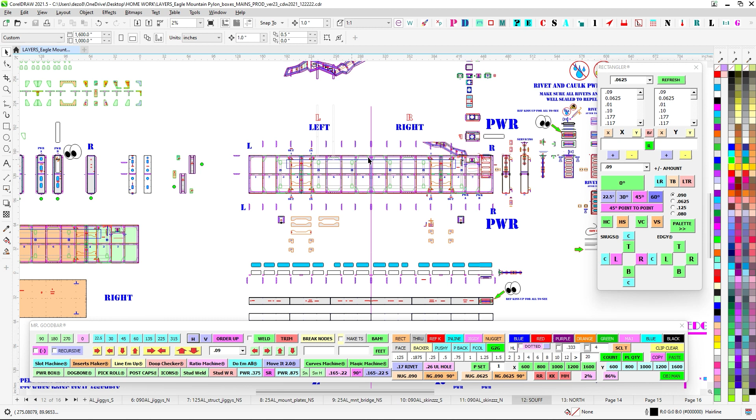But also they're a little easier to learn on, and a lot of the stuff on those will be transposed to this one. That's why I want you to watch that video first. I'm not going to over explain a lot of the box making on this, even though it's just bigger. It's going to be a lot of the same.

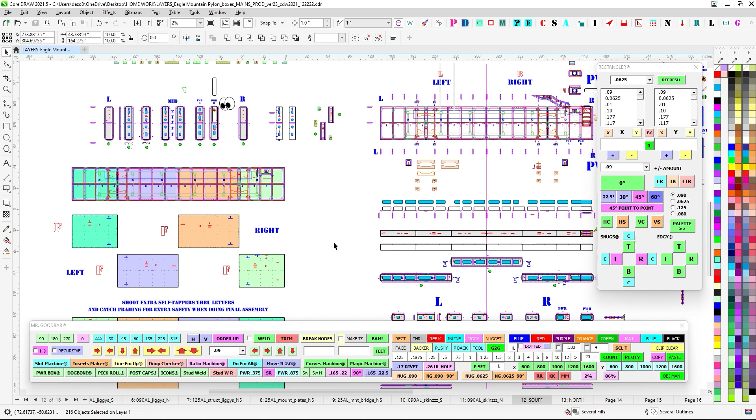What I am going to go over is obviously all the power stuff, and how the Mountin mounts here are going to, we're going to have like a bridge that the Mountin's attached to. So that's pretty much all that really needs to be focused on, the differences between the two. You can see where it's essentially a casino box, but just 2 of them.

This is going to be a lot similar to an oversized version of the Loma Linda Monument you did. You can kind of recognize the 2x there. So anyway, let's get into it. Let's get into the lay of the land. I'm going to need my trusty page turner here. There we go. So let's load it up.

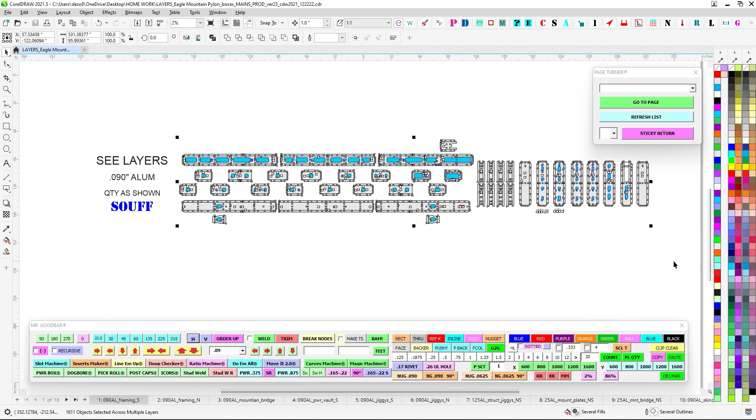So this one is broken into north and south. Like I said in the other video, the south side is going to be the one that faces the one that we're sort of used to looking at. And that one's going to have the power in it. So I have it all broken down with just the framing here. That's the south side. And then we have the north side framing.

090 parts for the Mountin bridge. We'll go over that. And this is going to be for the power box. This is going to be for the power supply. Look for these little things here. You got these little squares here. And then this is going to be for the main power in and the switch.

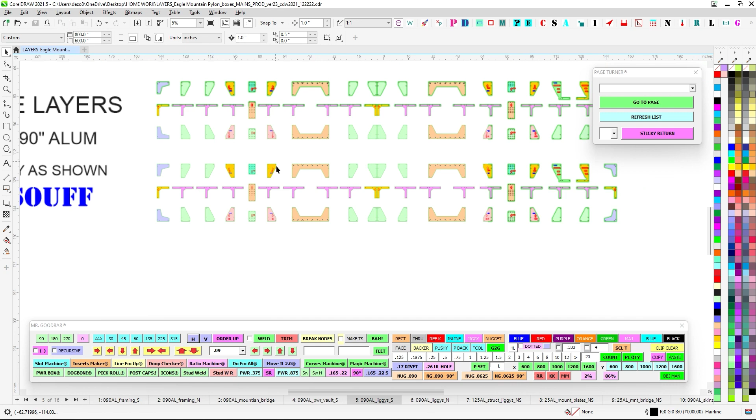All the jiggies, I broke the jiggies up south and north. We'll get into it, but we don't have to worry too much. South is the only one that has these 2 weirdos here. Otherwise, everything's the same. And north is all the same, except those weirdos are not there, but they'll have their own little north version. But otherwise, for the most part, everything else is all the same.

For these big boxes, these jiggies are different than the casino ones, but you'll see that they obviously won't fit. They're a little bit different size and stuff. But again, I encourage Route to just focus on the smaller casino ones first, get all that taken care of, and then there won't be any confusion with jigs and stuff.

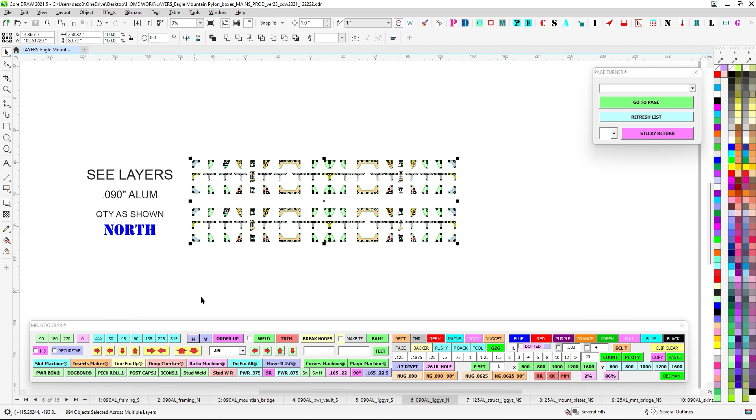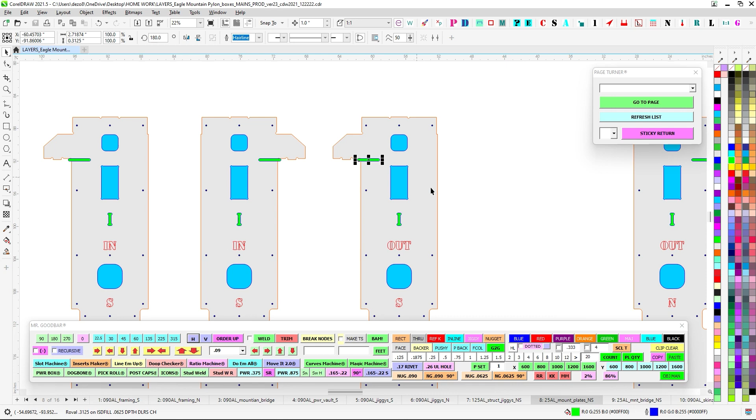So anyway, now you have structural jiggies. You know how we do when we do the 2x4 to a 2x2, I give you a super uber place to weld and get really structural. So you're going to have a bunch of these 1/8 inch. That way you can weld eighth to eighth. You'll be good to go. Again, these look very familiar. You'll have the same little cutout spots, except these are just extendo versions.

You have an in and an out, but you'll have these 1/4 inch plate, and these are for the north and the south. And then also we're going to have these little bridges. These are the same plates as the casino, but again, just kind of keep everything separate. And then we're going to have a bridge crossover strengthening thing. So we'll go over that. This is essentially like a modified Mjolnir. So you'll see what's up with that.

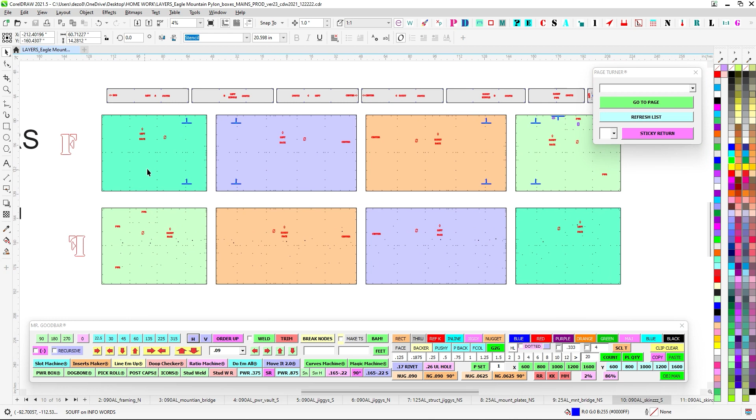And you'll have your skins, just like the casinos, except bigger and more of it. But you'll have your slots here for all your power and whatnot. But again, you have your south side. So everything's going to have an S. So keep separate, keep everything south. I got everything labeled like crazy.

And we got your north. And again, everything's going to be very similar. So, all right, well, let's get into it. Again, let's start with what you're going to be copying from the other boxes. So again, you're going to have your 2x4 skewered. These are just full sticks because, again, they don't come in the 280 or whatever it is. It would have been nice.

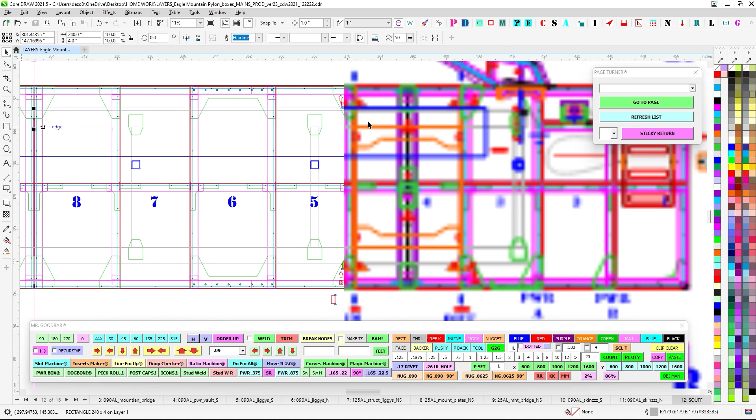But essentially, you're just going to center these, go ahead and measure and make sure they're equal coming out one end and equal coming out the other. And then that way these are centered. And then you have one little spot here to slide your 2x through and kind of secure it. Just make sure that these are 90 degrees.

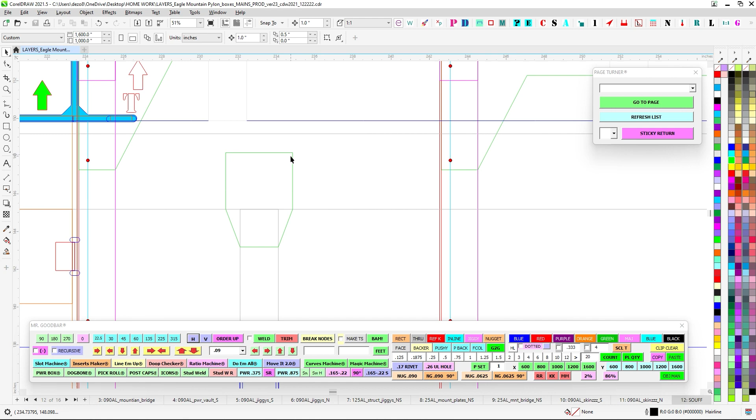You'll take your 1/8 inch gussets and just kind of line them up like so. And that gives you a full burn here. You can do full inside here, and then you can burn along here and here. That's going to really make sure that that's nice and strong.

Same thing. You're going to bring your top and bottom frames. You can see where I have them in 3 pieces here, all one piece, because the casino ones have the little funky ends. You don't have to worry about that. So in certain ways, this is actually easier. It's just bigger, but these are going to be actually a little more straightforward than the other ones.

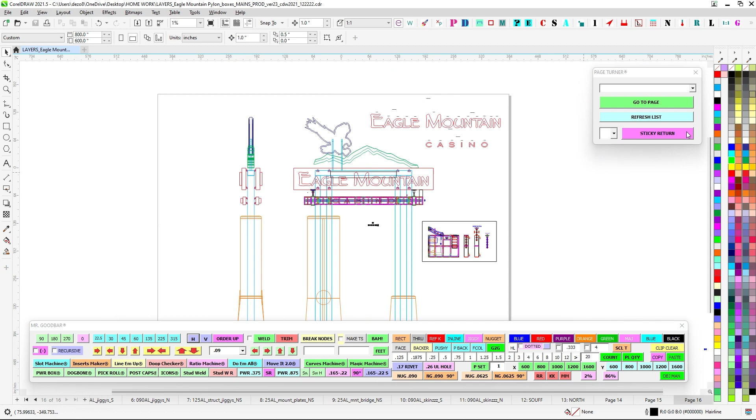So anyway, you're just going to do your usual middles. I have all the middles labeled. I got 8 working the way out to 1. And then I have 8, 7, 6 working all the way out to 1. Now, unlike the casino ones, there is going to be a north and a south. Oops, let's see. Yeah, there you go.

So there will be a north and a south because, like I said before, the south side is going to have power in it. And so everything's going to be all customized and weird for the power. The north side does not have to worry about that. So the north side is going to be 100% secondary. It's going to be all LED cable.

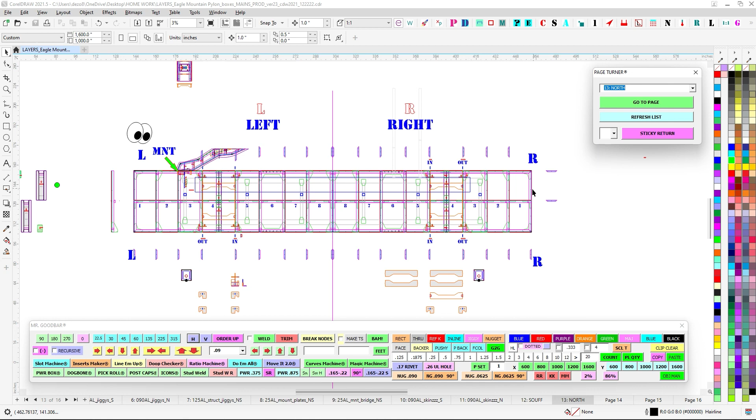And it's also going to be the method to feed the casino boxes up from the bottom, like I said. And that's going to come through here, and we're going to get it up to this hole, go through the mountains. So I'll show you that. But anyway, otherwise it's going to be the same top and bottom frame. You're just going to rivet it together.

And then you're just going to put your verticals in. You have all your verticals here. The verticals are all the same. You have your end piece. I have an F towards face. So you have your left side as you're looking at it. So as you're looking at the south cabinet, you'll have all of your left side here and you'll have your right side here.

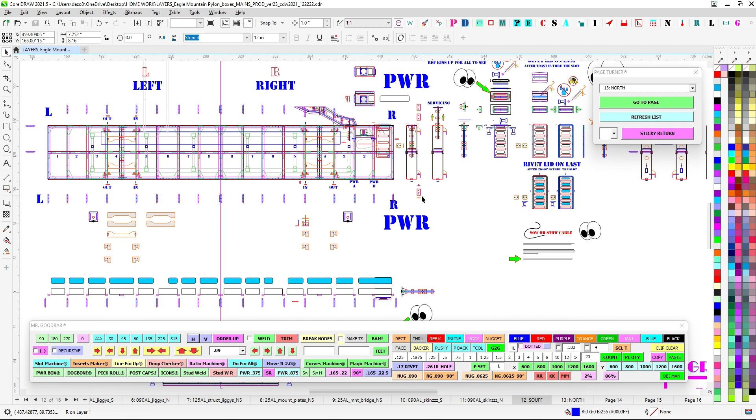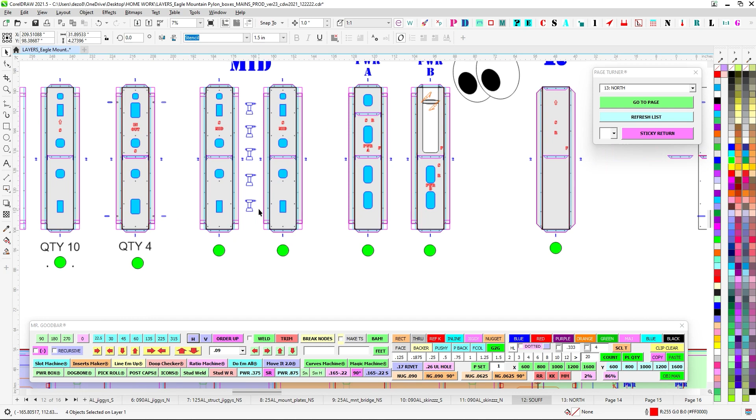So on the south side, the mountain touches on the right side. You can see I put this line right through the middle. So everything on this side's the left, everything on this side's the right. So that way everything's facing proper. So you're going to take your verticals. The verticals are all the same except for the in-outs. Like the casino, you have specialized ones that are in and out that mount to the 1/4-inch plate mounts.

So just like the other one, you're going to rivet these together with your in-out ones. Now, like I said, these can be swapped back and forth. So you're going to take one of these and rivet it to the out. You're going to take one of these and rivet it to the in. And then that will allow you to put it in the frame where it's supposed to be. So the in one is inside to the center. The out one is out from the center. And you can see where it faces that way and it faces this way, et cetera.

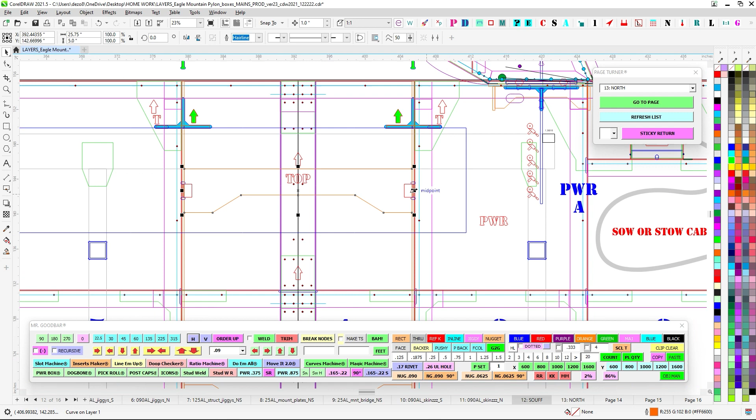Now, the only difference is when you go to put these in, this guy here is going to be a torsional stiffener that's going to butt up against the 2x4, and it's going to allow you to really get some good welding here and here. This thing is over 2 feet long. You obviously don't need to weld the entire thing.

Calm down. But you can do a nice 2-inch here, burn this really well, and then symmetry of strength. You know, I would put some 2-inch stripes here and here and just kind of stripe it up. That's going to give a nice torsional strength to this tube right here, and it's going to create a nice solid box right there. And then these are going to transfer load up to the mounting plates.

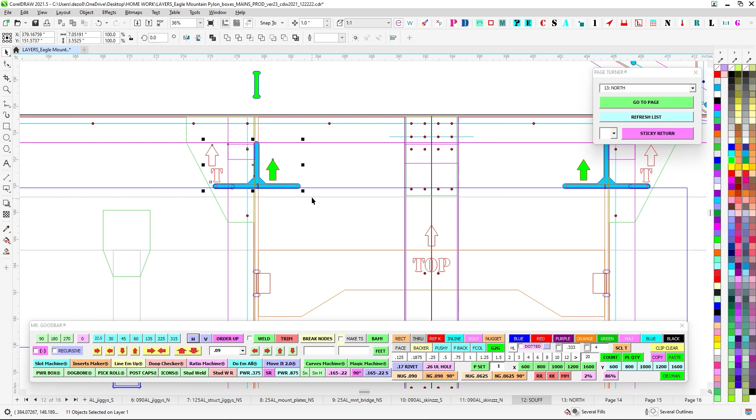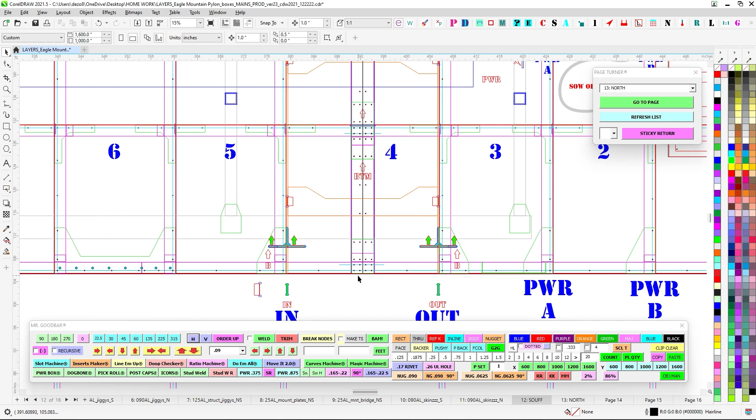These mounting plates are exactly the same as the casino. Again, like I said, do the casino first, get your eye in. And then just like the casino, I have some super strong seams right here for the face. So the faces will be chilling right here. So that's going to be the same thing. It's going to be a C channel. You're going to have a piece that slides through, and that's just going to be dedicated to stabilizing the face. So make sure that's in there nice and strong.

And then that way the face goes to here, and then the face will go to the center, and then the face goes here, and all that. And again, same thing. Let's make sure we get those faces on there super strong. Make sure we get them on there, do some safety rivets all the way around, make sure everything's on there nice and tight.

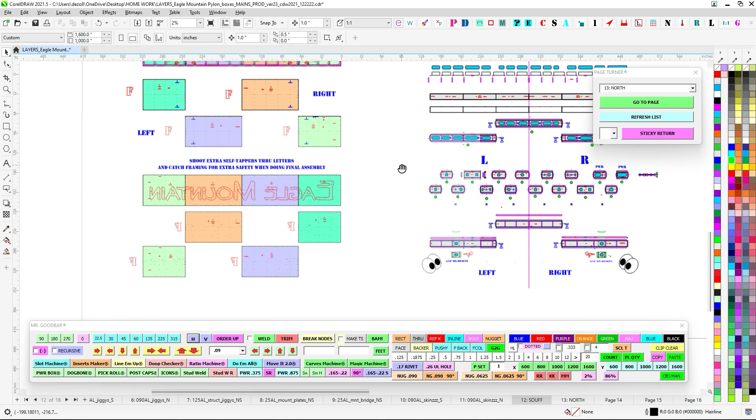And again, when you go to final assembly, like I was saying before, where these cross, the verticals here, and even the cross mounts here, go ahead and eyeball and shoot some safety screws all the way through. Once this is all said, before you trim cap them up, before you seal them up, that way we can get some nice safety screws through the face. Like the other one, I avoided the verticals so the mounts wouldn't be in the way. But let's make sure we get those into the mounts where we can, into the verticals.

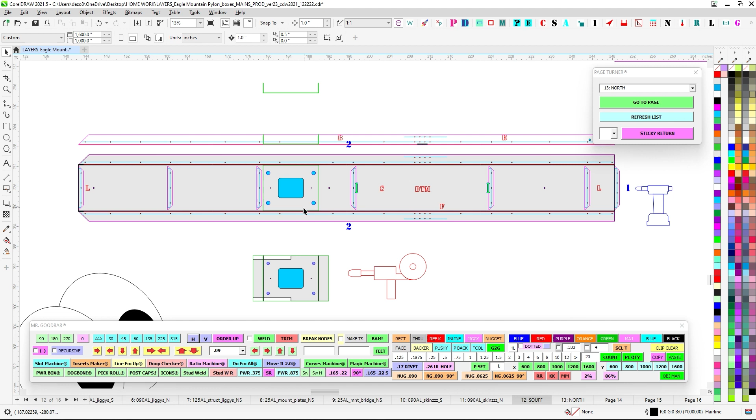The difference in the framing as well is, remember I said we have those mounts that are going to mount from the bottom from the other ones that are going to bring power in. These are going to have the 5/16 steel RivNuts, but in order to recess those down so the RivNuts aren't scraping the ground if this thing's sitting against the ground, you're going to do these recess plates.

Make sure they go in this way because you can put these in after you put your braces in. So it's going to fit. You can see where it's going to fit, and it's going to snuggle and clearance where this jig is going to be. It's going to be notched and clearanced for that. But that's where this is going to be, and that's where this is going to be here.

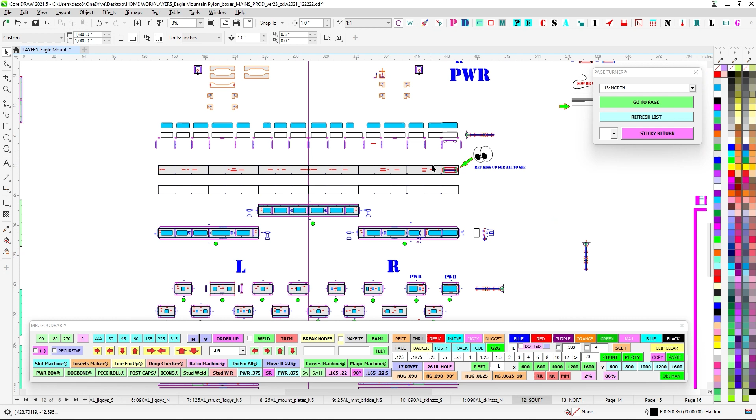And this is where the power, you can see I brought this in from the casino side. This is going to be where the power is going to come through, and you're going to get your secondary up to here and get it connected to your power supplies. But again, that's coming up. We'll go over that. So once you get the frame ready to go in your welding, you're just going to bend these up, cleat them in a spot, and weld them to the frame. And then from the outside, do your 5/16 steel RivNuts. And that'll be how those other guys attach.

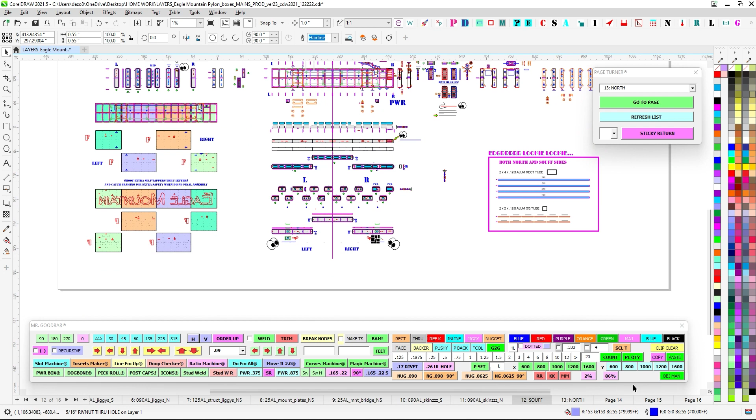Let's see. Do I have that on the north side? North, south, north. Thought I brought those over. Anyway, you remember from the other video. Okay, so that's going to be the frame. Let's see what else we got to deal with. These are there. You got these guys here, skewer through. So that's all going to be the same.

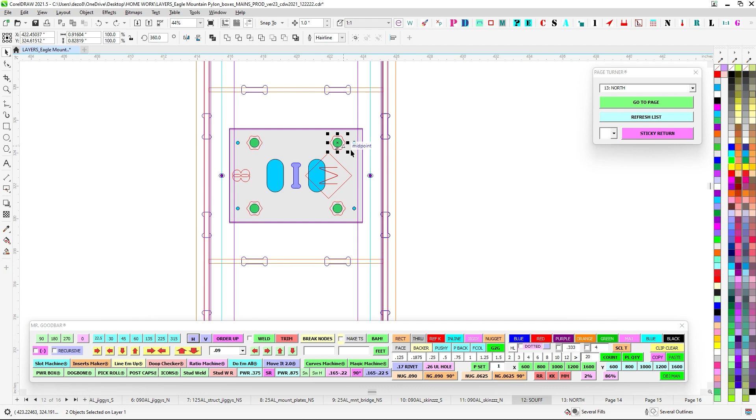So let's start going into what makes this whole thing special. Up here, if you remember, we got the mountains coming in. So this is a condensed version of it. When the mountains come down, they're going to have this plate system. So this is translated from the mountains. You'll have had the 1/2-inch nuts that you welded in, and we will have an open gap here where we were going to bring all of our cables.

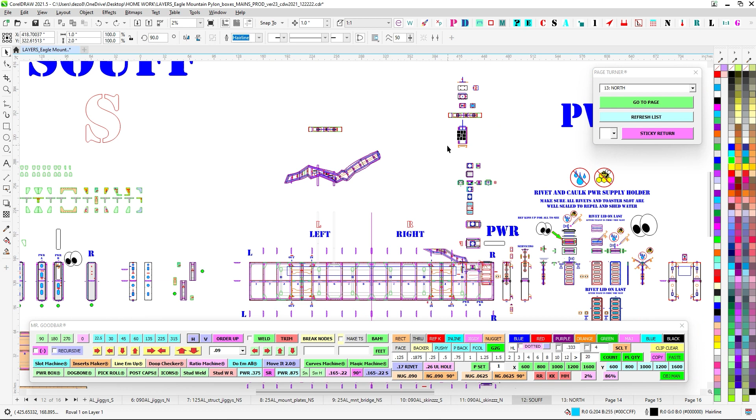So you remember in the other video, you've got all the cables coming from the Eagle and from the mountains and everything. So you're going to have all these leashes, and they're going to collect because there's a door right here. They're going to collect right in here, and then we're going to have to be able to come through the mountains into this area, and they're going to poke through. So this thing here, as you see in orange, is now going to be a bridge that is going to connect across the two boxes.

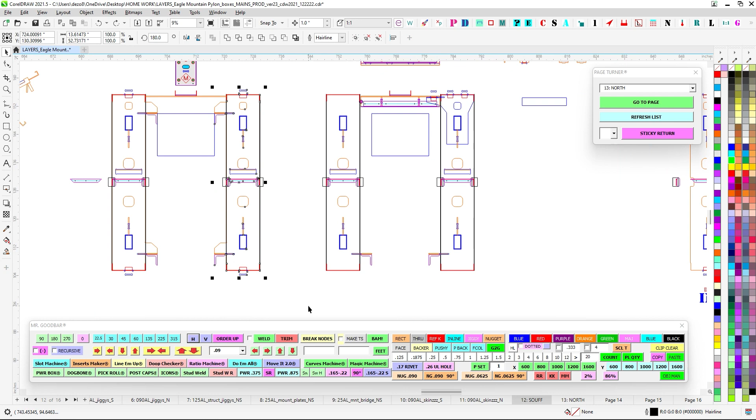So here's your two boxes here that we're building, the two big boys. And this is going to be the bridge that attaches to a special connector that we're going to put in before, so anyway, I get a little ahead of myself. So this will be your orange bridge. You're looking at it from the side. And so you can see here, this will be the mountains. You'll be able to bring your power through the mountains, through these holes here, and then they'll live inside this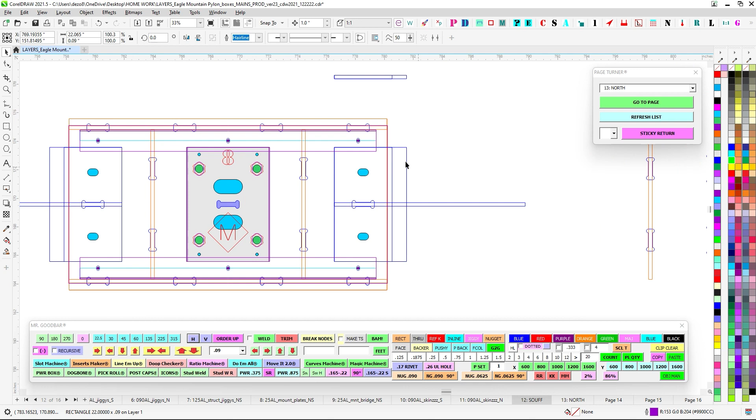bridge. So the bridge is going to have a removable bottom plate, and then you'll have 2.5 inches of wireway that we can tuck up inside. And then to install, we'll just go ahead and screw this from the bottom. And then when you're looking up from the bottom, it'll just be kind of a clean little box with some screws, but you won't see any wires or anything. And that's going to hide all the mounting and stuff like that.

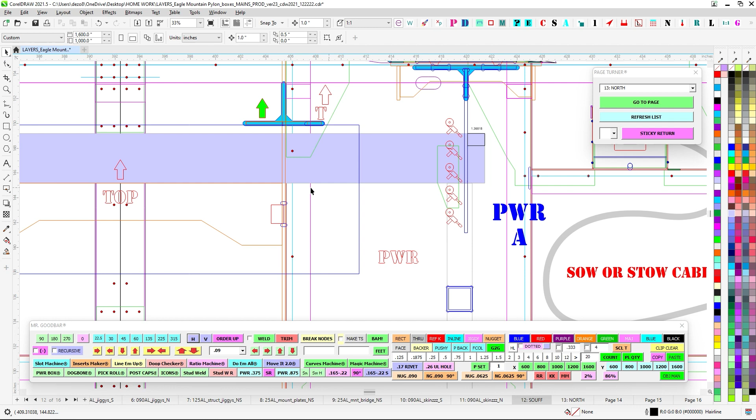So in order to make this work though, let's go back to the frame. So as you're skewering everything through, you're going to take your 2x2 or your 2x4, right? You're going to skewer it through. And again, make sure that this is evenly distributed between here and here. I'll tell you that right now. This is about 13.875, so almost 14 inches. So get about 13.875 sticking out from this flange here. Go ahead and center it over here.

And then on the power side, on the right side, you're going to take what you see, this blue here. You are going to saddle this over the 2x4, and I have it extend down. That way it grabs the 2x2 as well. That way the 2x2 is in play. And I even made a funky condensed version of that to clearance that weld. But you're going to burn this plate to both the 2x2 and the 2x4.

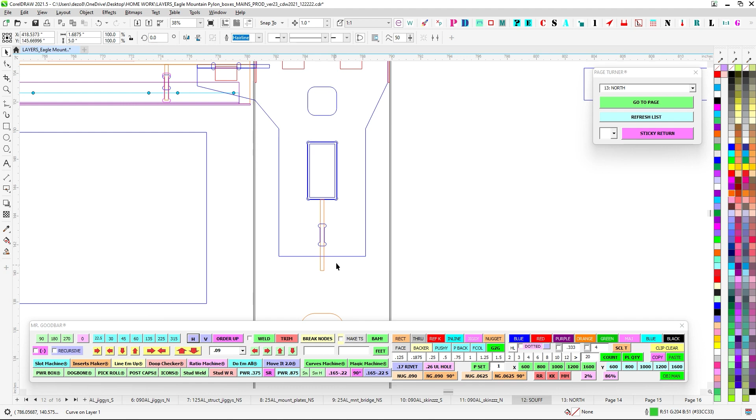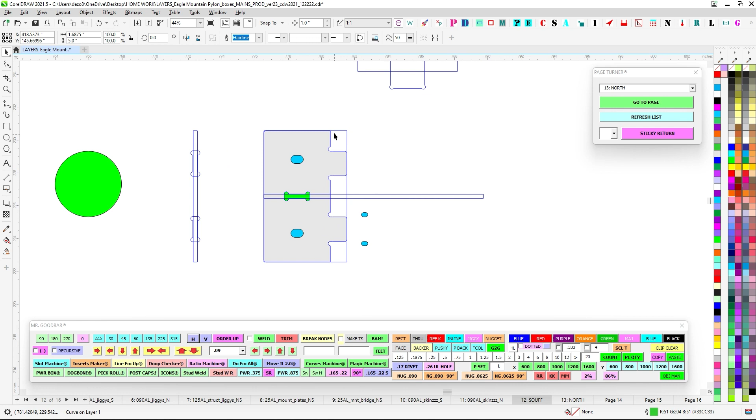Now I don't have it notched here, but essentially this is all your welding all the way down here. And then that piece is notched up here though. So you can see how much you're going to be able to burn. And that's going to index to the top 090, and then it's going to stick out, and then it's going to get its own plate. Now this is only going to have 2 tabs sticking through the frame. It's not going to have that weird kind of thing on the other mounts. It didn't need it. This is just for the mount. So you're going to slide this through, index it to the dog bone here, boom, and then burn it.

And then you'll be able to, while it's sticking through the frame, you can see here's your 2 dog bones right here and here. You'll be able to hit these up and burn those. And then this is where it sticks through the skin. And then that's going to be the receiver plate for the bridge. Now the mount's attached to the bridge, and then the bridge is going to attach to the mountain plates. So here's your blue mount plate.

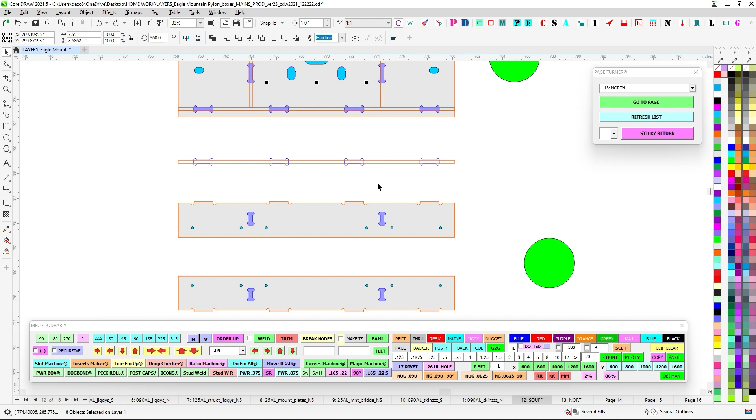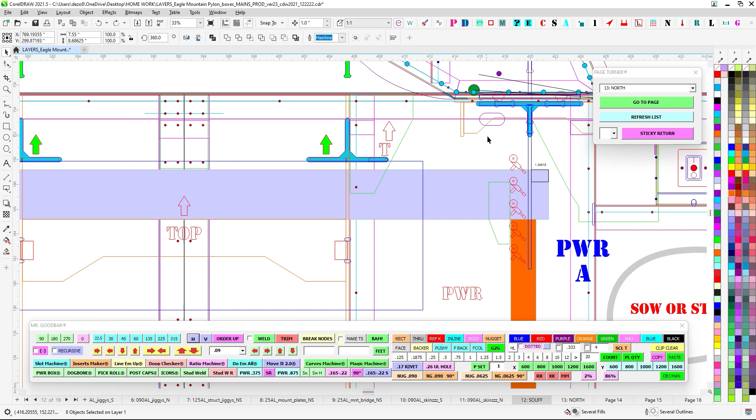Here's the orange; that's why I'm saying it looks like a Mjolnir. And then this is where the mount attaches to this 1/4 inch, super, super awesome. So you have your 2 sides here like a Mjolnir, and then you have your 2 cross points here. And then these are notched up to allow wires. So all the cables coming in from the mountains, from the Eagle, from Eagle Mountain on one side, Eagle Mountain on the other side. You can see orange right here.

This bridge is where everything comes through, and it's going to cross through, and then it's going to work its way through this hole into this area for power. So again, we'll get to that, but we'll go ahead and clear those. So anyway, that'll be your mount there. Make sure that gets in there. Make sure that gets burnt to the 2x4 real well.

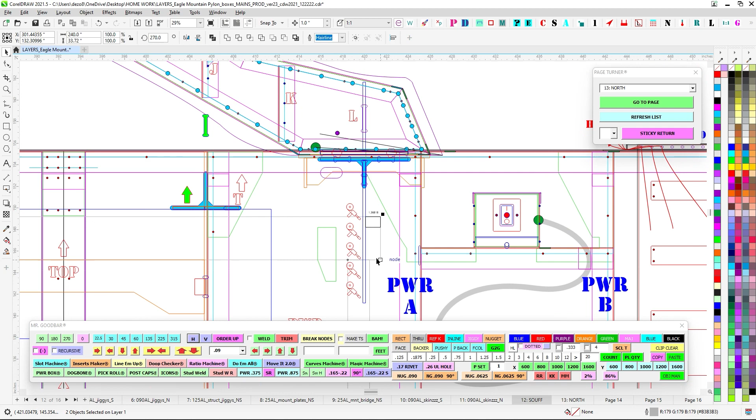And then, like I say, you're going to do all your mounts like you did before. And then you're going to do this mount. That's really the only difference. And that's for both, the north and the south; obviously they just face different ways. But on this side, we don't have any power or anything. We're not messing with the power, and we don't have all the primary stuff over here. So north is going to be slightly more simple.

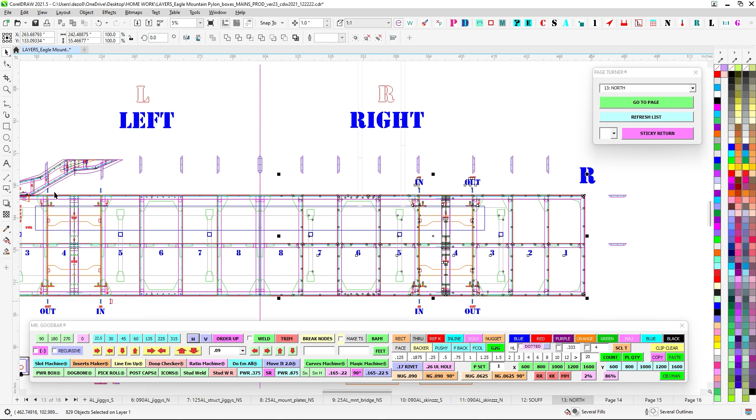It's just going to be mounts, but you still have this mount over here for the Mountains. So look for the MNT mount jig, and it has the dog bone clearance. Otherwise, all of these jigs are basically the same for the whole box. It's just this one right here. I'm calling it out. Just look for this one that has a dog bone. That'll let you make the transition bridge there for the Mountains to go across.

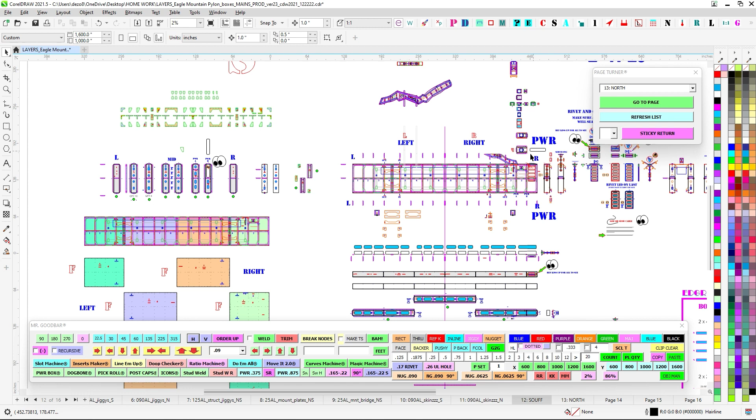Otherwise, that's it for the north. The north is going to be the most simple for you. So I'm closing in on it. Let's talk this whole power nonsense over here. So on the south side, this is the south side facing us, the one we're used to seeing. This will be where power comes in. You can see where this will be your connector, and this is where all the power is going to run. The secondary is going to run up, and we just need to get it up into this area.

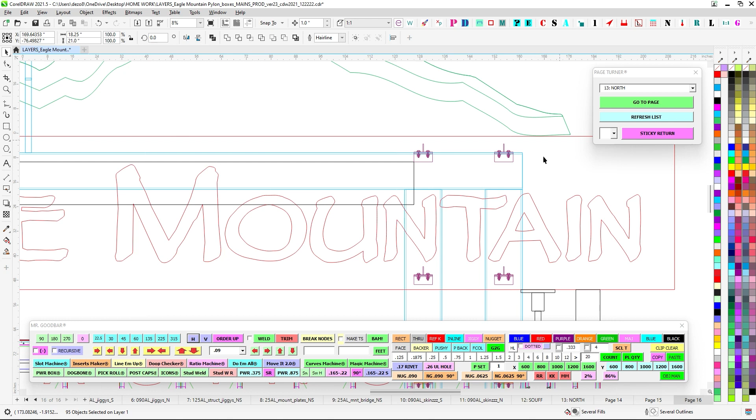Same thing again. The other north-facing Eagle Mountain, collect everything into either 1 leash or 2 leashes. We'll go over that. I don't know what your count's going to be, but you're going to collect everything and bring it to this side, on the north side. And then it's going to cross the bridge that you saw, and it's going to come into this guy. And it's all got to get right over here. So let's go to that.

So first and foremost, you're going to have this little specialized tray. So you'll look for the specialized jigs, these little specialized jiggies right here. It's going to have its own separate little mounting tray here. And that is going to be where we put the main in. This is going to be just the switch, and it's going to be just for power in.

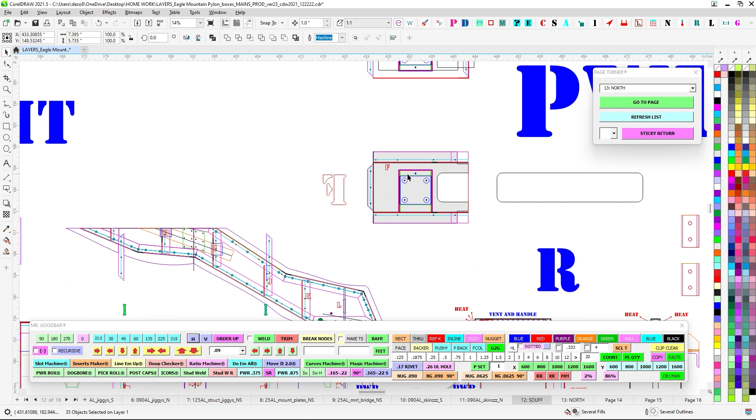So for install, there's going to be a junction box either here or here. You need to get that junction box with your primary power in, and it needs to enter the south side box somewhere. And then you just need to get it over to this area. All install needs to do, theoretically, is get that power collected from somewhere into right here, and that's it.

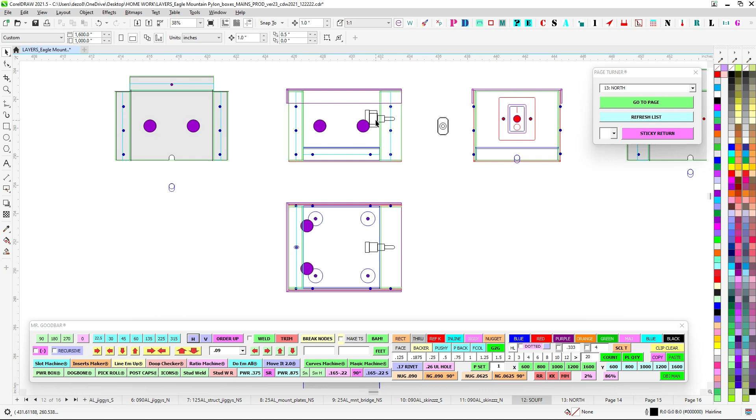So you can see I have plenty of power in here. I've got power coming in on the side of the box, and all the way around. So you can bring your power in anywhere in here, and then all you've got to do is make a junction, and that's it. Now, once Fab gets us all in there, you have your switch and everything, how we do. It's got the patent pending, recessed, all that. And I have power A and power B.

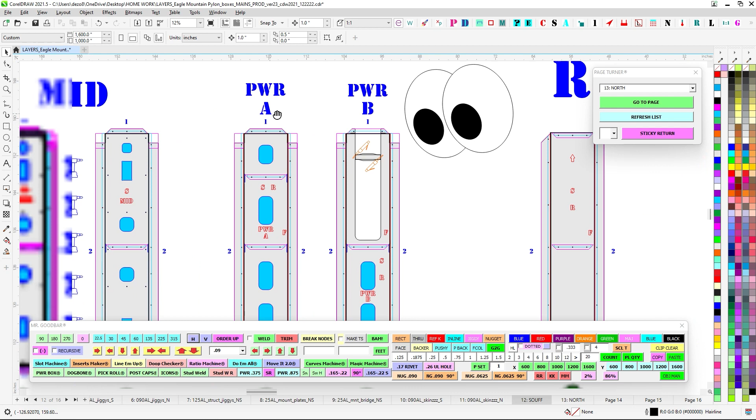But you can see how much is cut out here, and you can see how much is cut out from the top at the power side. All of this is going to be open and nice access for install. And you can see where on the power side, see I have power here. I have the right side south. I have it all labeled really well.

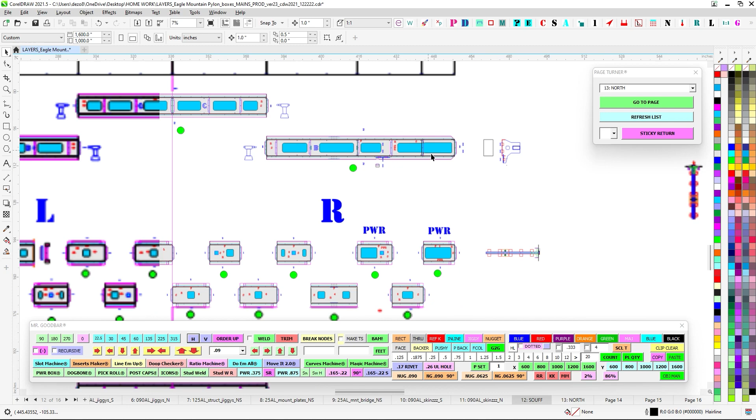So you have these very nice big openings as opposed to the other side. You don't need openings. And that's going to allow for plenty of access in this entire area. So you can see where this nugget stops here. All this will be open. You see where this nugget stops here. All this will be open, and you'll be able to then access power supplies, and it'll be easy for service, easy for install. Knocking on wood here, I'm hoping, but we're all good.

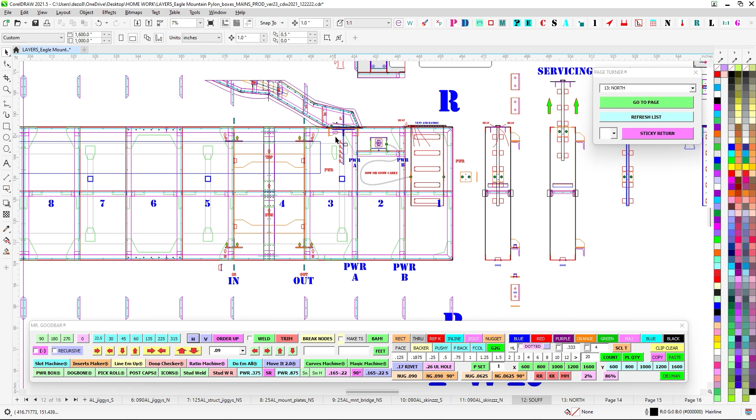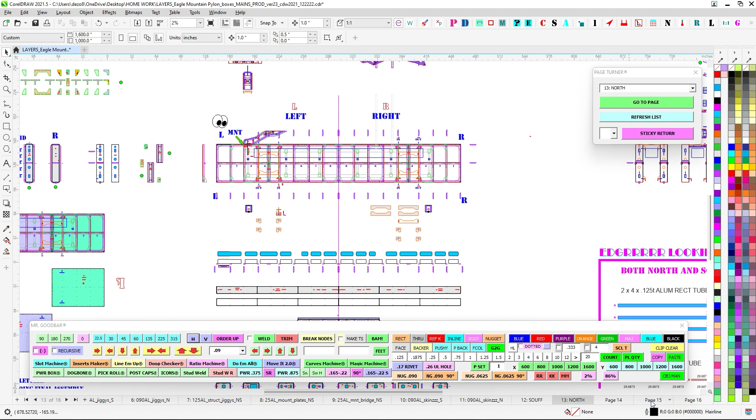So that being said, as you're doing your leashes for everything, that's why it's important to bring in some 12 gauge leashes, because we're going to have to be doing some runs, and we don't want the voltage drop. So make sure that when you're doing your collections on Eagle Mountain on this side, when you're ready to have a leash go across to the other box, make sure that leash also has plenty of travel to come around through here.

So this is going to be where we're coming in right there. And then it's going to travel through here. It's going to cross over. And then we're going to make sure we have plenty of play, because the whole idea behind this is it's going to lift up and out when it's time for service. So in order to keep our UL minimum 4-inch distance apart, and the fact we're going to have plenty of power supplies, I opted for this slide out, kind of easy to get to, kind of multi-purpose, solving multiple problems at once.

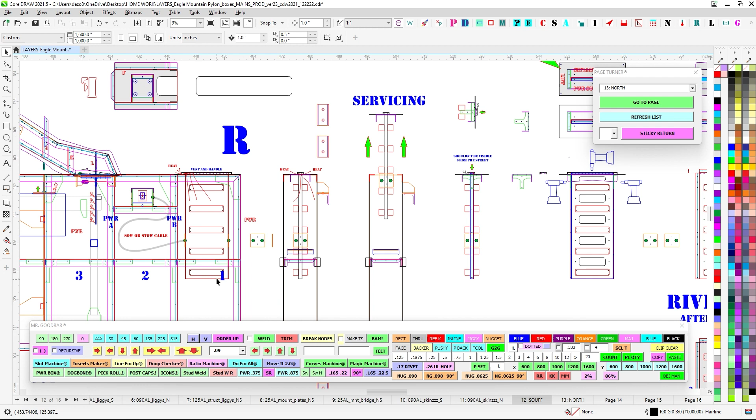It's going to have this removable slide out that's going to have access to all 10 power supplies. So you're going to want to make sure that all your leashes have plenty of play to be able to pull this up and out and have access to everything. Now, that's the whole reason why I asked you about that spool of SO cable. We have that laying around. You're going to want to make sure you have a generous leash.

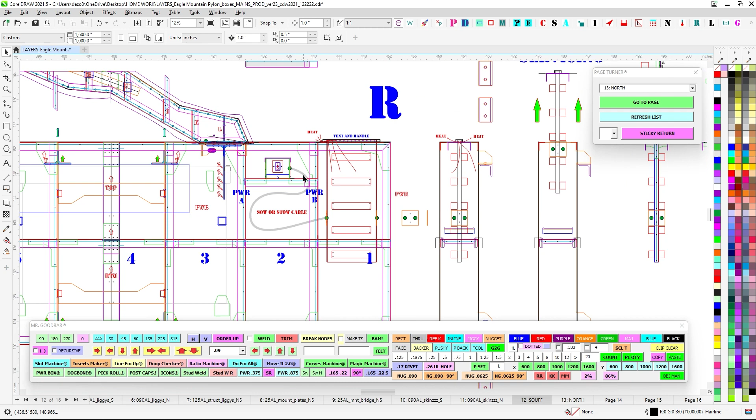So what you're going to do is take that cable and go from the power box on the side here, right? And you're going to make a nice generous leash that's going to get stowed in this area, because this is all going to be open right here, because you can see where power B has this giant opening. And this giant opening is to allow that power snake to just coil up right here. That's going to be plenty of room to pull up.

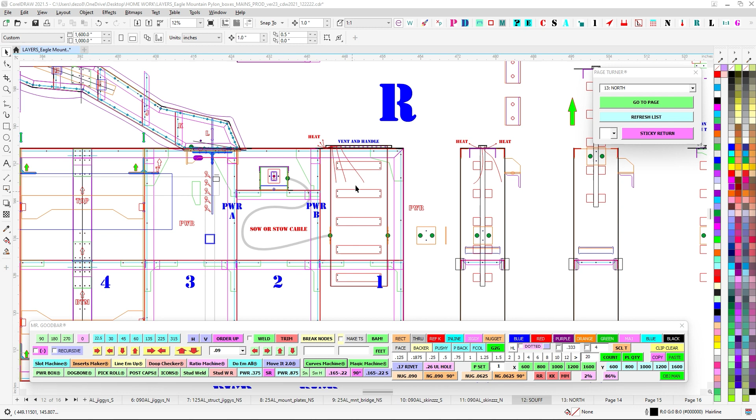As a matter of fact, let's just take the measurement. I have 46 inches on this right here. So you throw a 72-inch mains cable right there, and that'll have plenty of room to take this all the way out and get to the bottom power supplies. We'll go over power supply loading here in a second, but I'll show you what's up.

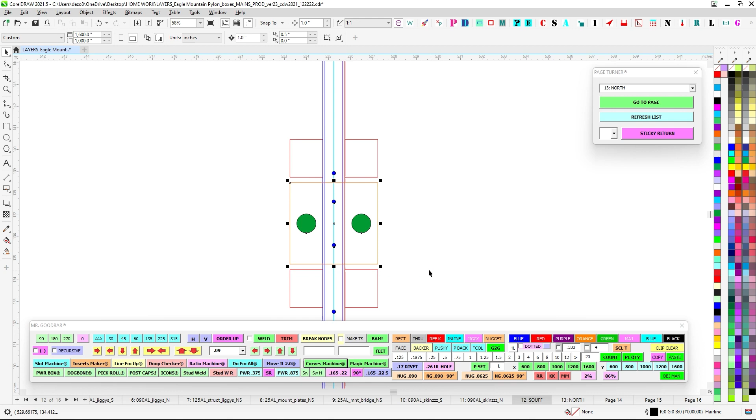So the whole idea behind this thing is it's going to be a one-piece deal, a 1-inch toaster frame that is going to allow all the power supplies to attach. And then it's all riveted. You're going to have a riveted little chunk here that's going to allow a spot to attach with a cable clamp system. Probably bring one in from McMaster-Carr, but you're going to cable clamp this, and then you're going to be able to distribute your primary to every one of these from here.

And then you're going to have that cable stowed in there, and it's going to be permanently attached to our primary box. And it's all watershed. You know how we do. The cable can be exposed to water and all that. So what you're going to do is build this thing. This thing's completely riveted, and it's also going to allow for heat dissipation. So I'm going to keep a 16th inch gap right here.

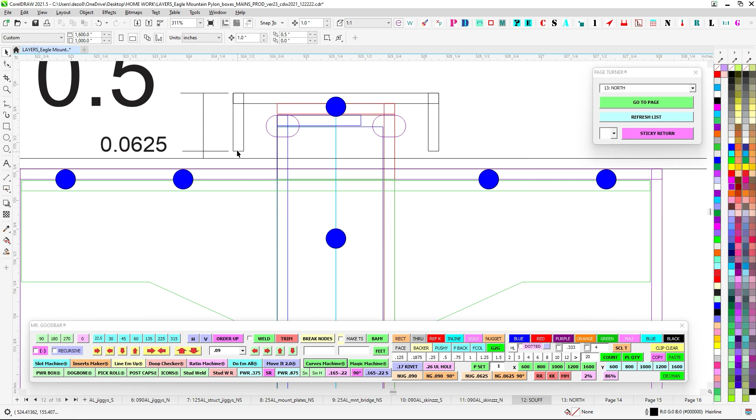You should see a 16th inch gap. If you don't, let's talk about it, because the whole idea is you're going to rivet all this together. You're going to take this one, put it inside that one, rivet, rivet, rivet. You're going to take these end pieces here, and you're going to sandwich them here, and that's going to be how this thing actually attaches to the top.

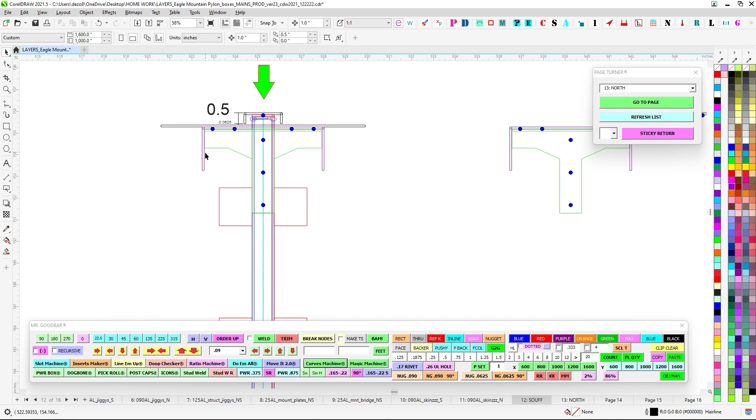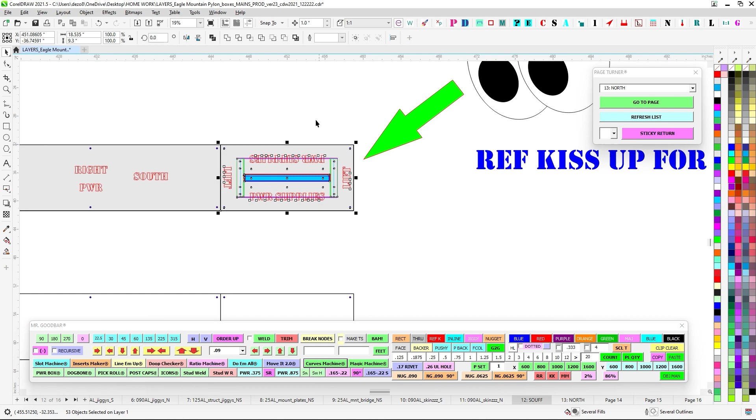And then the top part here is this kind of cover drape system that's going to help with water. That then gets attached to the actual permanent skin. So the skin that we normally take off, the cover, is actually going to be where the power supply thing mounts. So when it's time to pull the power supplies, they're just going to undo all the screws, and then off it goes. So all of this, needless to say, is pretty straightforward, but just make sure everything's done in proper order so you don't trap yourself out.

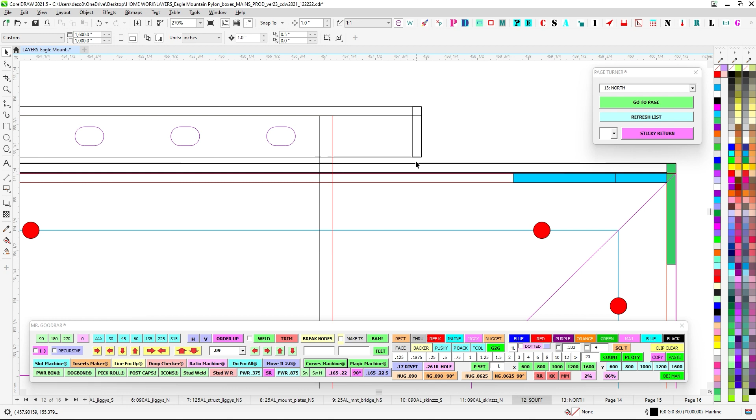But the idea is that all these holes are going to lead up to these holes up top, and these holes are going to act as a vent. So what I'm hoping is that on both sides we have these vent holes, and it's going to be open on the bottom here too. So all of this heat theoretically should be able to vent up and out all of these holes up top. And then the cover itself is going to act as a sort of watershed, but also the 16th inch hopefully will keep the bees out, because we don't want the bees living in there either. So you want to see this gap, and you don't want to seal this up, because this is going to allow for the heat to dissipate out.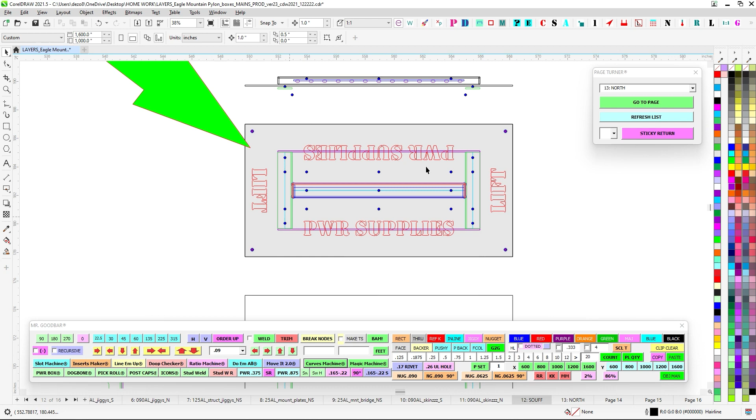But you're going to want to make sure that all of this is sealed up very well once you have it built. You're going to want to caulk everything. You're going to want to caulk all of the rivets from the bottom end. Any of these rivets here from the bottom side, once you get everything riveted together, you're going to want to caulk, and you're going to want to caulk around here. Make sure that no water drips in, to keep everything as sealed up as possible, keep the bees out, all that. But once you're said and done, you rivet these all in there, you'll have all of this ready to go for the toaster slot.

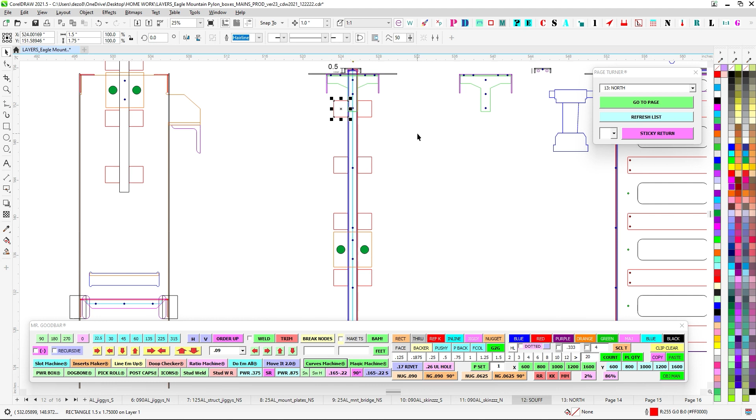Now, as far as loading is concerned, I went ahead and overdid it. I imagine you might be able to do both casino boxes to one power supply. So if you look here, let's say for safety, we do the top eagle logo on one side, and the top eagle logo on the other side. You do the Mountain on one side, you do the Mountain on the other. Now you have the word eagle on the big box, and the word eagle on the other big box. You have the word Mountain on the big box, and the word Mountain on the other. And then you also have the bottom box casino on each side.

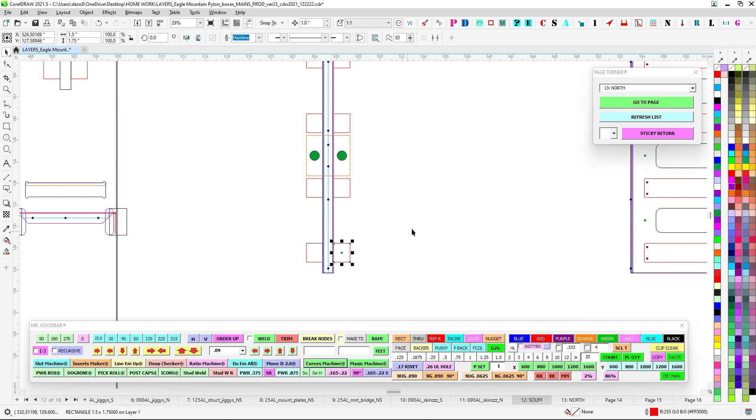Now, the bottom box casinos might be able to combine to one. The Mountain might be able to be in one, both sides. So again, once it's all set up and wired, you'll be able to do your count. But I have this set up to do the maximum amount. You might not need all 10, 5 on each side. That's fine. So anyway, I think that's it.

But that'll be your vent and your handle. And then when it's time to install, they can just pull up on that. You're not really going to see it being that high up. I did sort of a workup on it. You have to be way far away to even start to notice that. So I don't think anyone's going to see it.

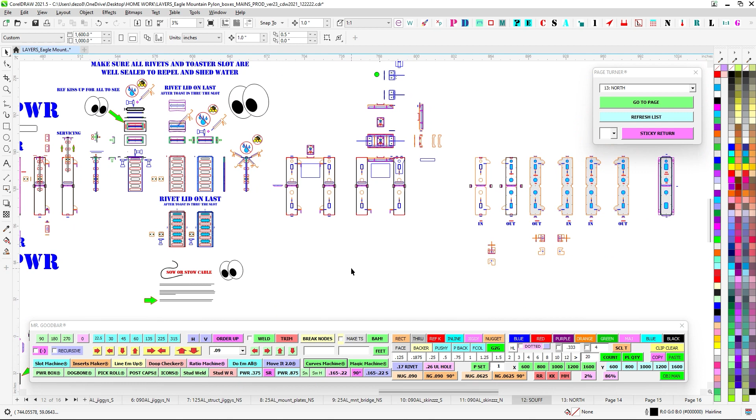So, here's all of our UL of why we can use it. So you checked, this is a wet location cable that we have. But again, make sure we have the proper cable clamps for both sides, here and here.

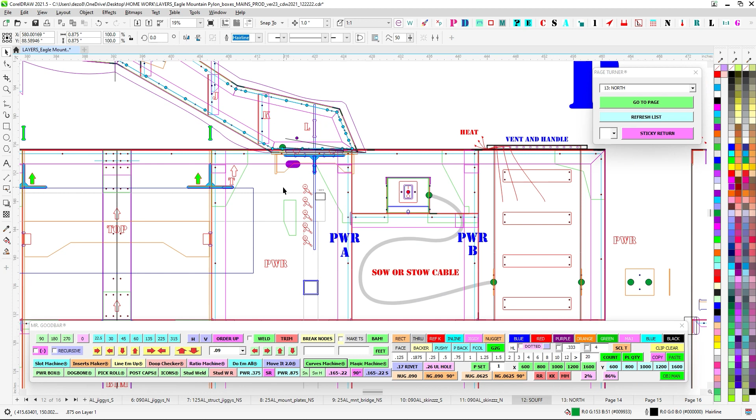Otherwise, I think that's it. So install, again, you're just going to want to bring your primary, get it to here, and then make sure that all of this stuff has the proper leashes, and then make sure you have plenty of leash length to come in and collect and sort of jumble.

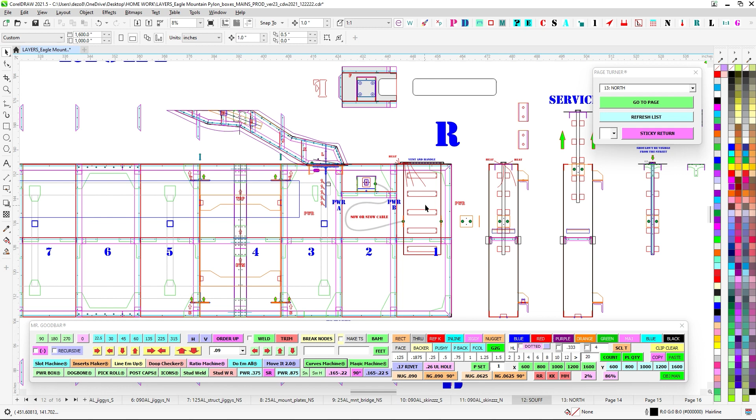And then the whole idea, though, is that this thing needs to lift all the way out. So again, make sure all your leashes at final wiring have plenty of play to be able to pull this up and work on it and slide it back down. But again, talking back from the other

job, your secondary LED cables are going to collect on the south side to here. You're going to run them up through and bring them up. Again, this is where I think we might want to do the 12 gauge, because you can connect these together fine on an 18 gauge, but then we want to maybe distribute that to a 12 gauge, bring it up and get it all the way up with plenty of play, right? Big old leashes coming out.

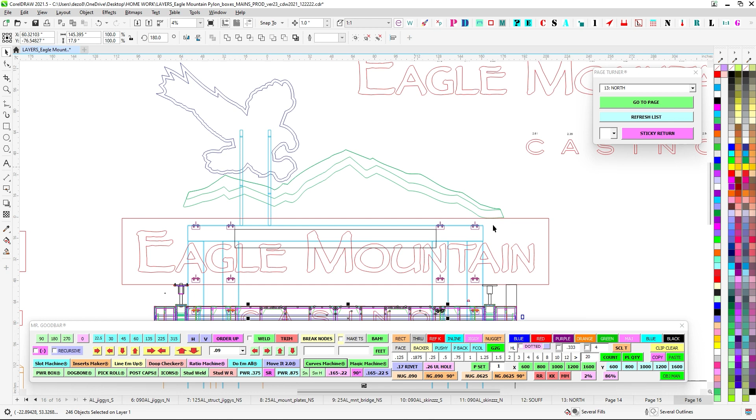Again, you need to figure out how many on both sides, but you're going to come to that bridge, collect it and bring it in. You're going to do these guys, bring them down. Remember, we're doing the 12 gauge leashes to get to here. Those come in. So all of this needs to have plenty of play, and then we can collect. It's better to just collect it than not.

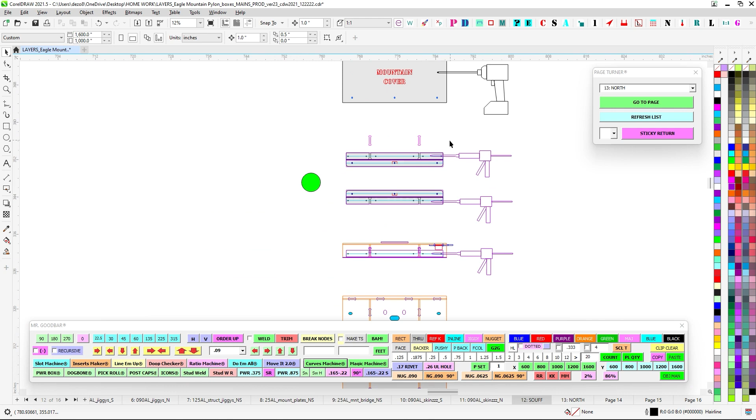So install is going to install the bottom boxes first. You're going to do the casino boxes first, and then you're going to do the big boxes, and then you can kind of feed the wire through those mounting doohickeys there. You're going to feed your cables up through. And then once these are through, you're going to mount these up.

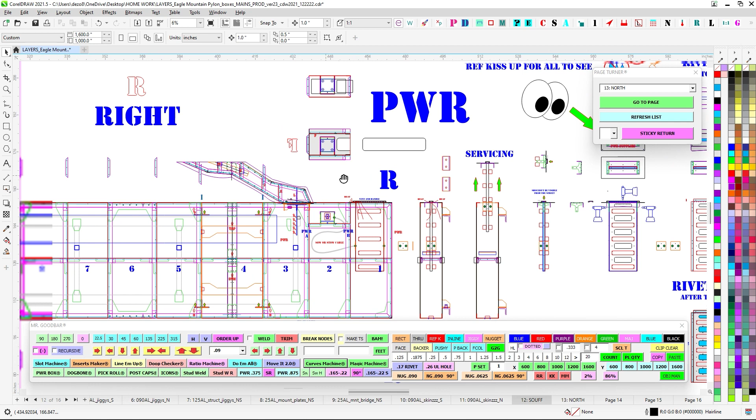And then once those are all mounted up like that, you're going to go ahead and collect all the wires and get everything hooked up over here. And hopefully all that goes together well. So fab, wiring this is going to take some time. So make sure that all these cables and stuff are all labeled properly.

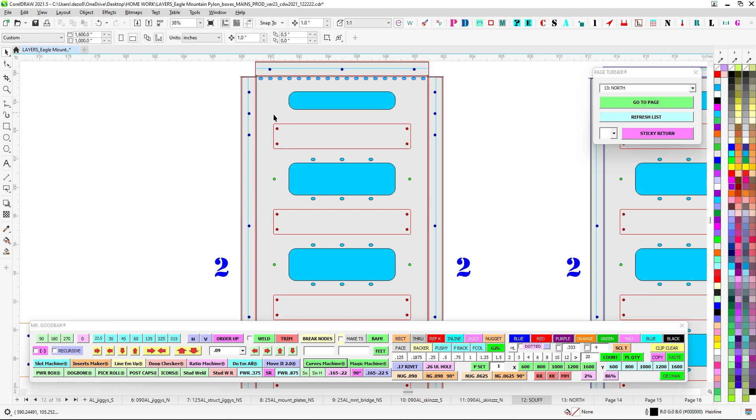Make sure that the leashes coming in are all labeled for Eagle and Mountain, north and south. And go ahead and write on this guy with Sharpie which each position is. I gave you plenty of zip tie spots here. These are all zip tie. I gave you plenty of grounding and bonding spots for everything if you need it.

But anyway, I think this is pretty thorough, pretty well thought out. I think everything is well explained, but I'm here for questions. It's all good. Same thing here. Make sure all this is Lorded up or caulked up really well. Once you get it all, go ahead and test fit everything and make sure that you get the right faces on the right side.

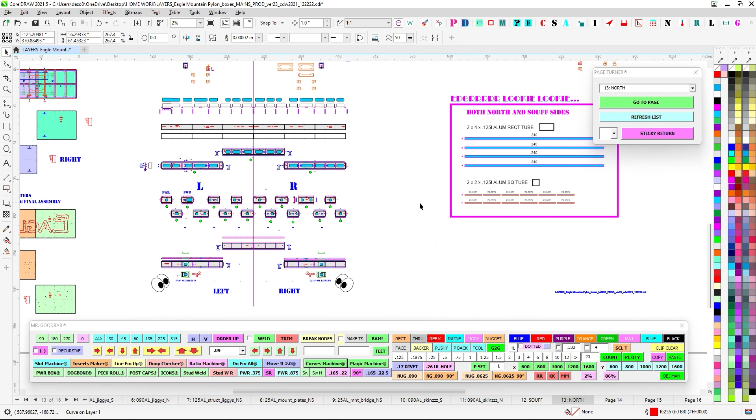I have it labeled north, south. So yeah, everything south has an S, everything north has an N. So just keep everything kind of divvied up. Your cut lists are the same for both. I have them labeled here, north, south. So you only have 4 sticks of 2x4 and you have all this 2x2 here.

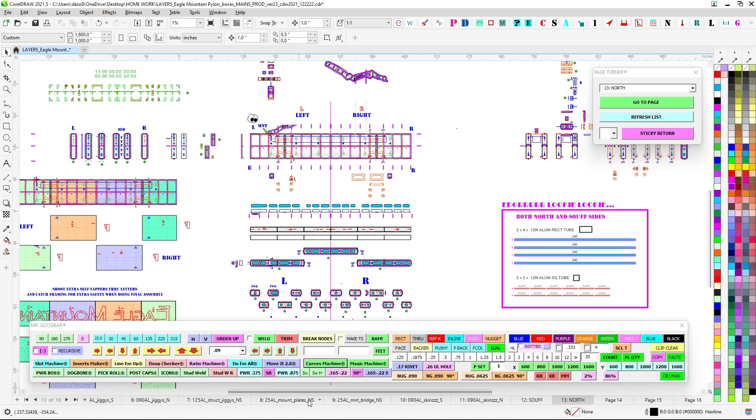But this cut list is the same. So don't double cut. Just do one of these lists and you're fine. You don't need to do both lists on both pages. So anyway, I think that's it. Again, refer to the casino one. And then this is just a bigger version plus a bunch of little weird power stuff. But I think otherwise, yeah, I think that's it.

So good luck. We're all counting on you. Check the technique. Check the technique. See if you can